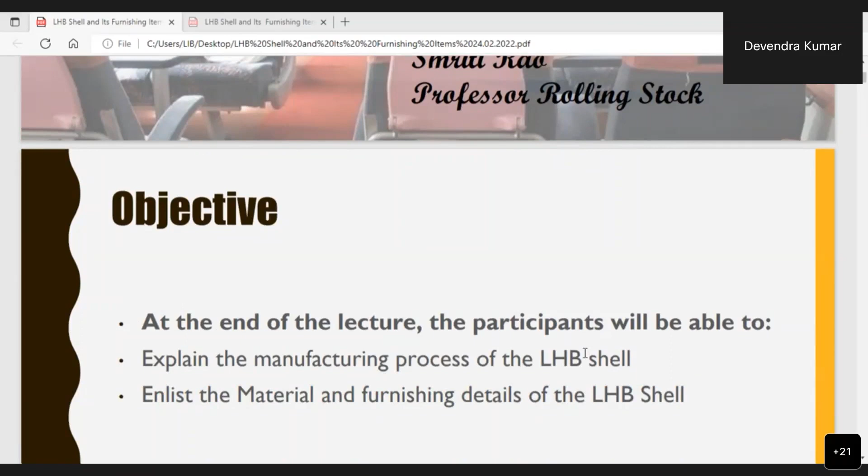Question: which of the following material is used in LHB coaches - austenitic steel, ferritic steel, Corten steel, or all of the above? Which one is correct? Some say C, but that is not correct. Others say A, but that is also not correct. Somebody else? All of the above - yes, this is correct.

Because in the LHB coaches, we are using all these materials in different components, which will be explained in this presentation.

Which of the following facts is not true about LHB coaches? The coaches are about 2 meters longer than ICF coach - is it true or false? True. Coaches got commissioned in 2003 - is it true or false? No.

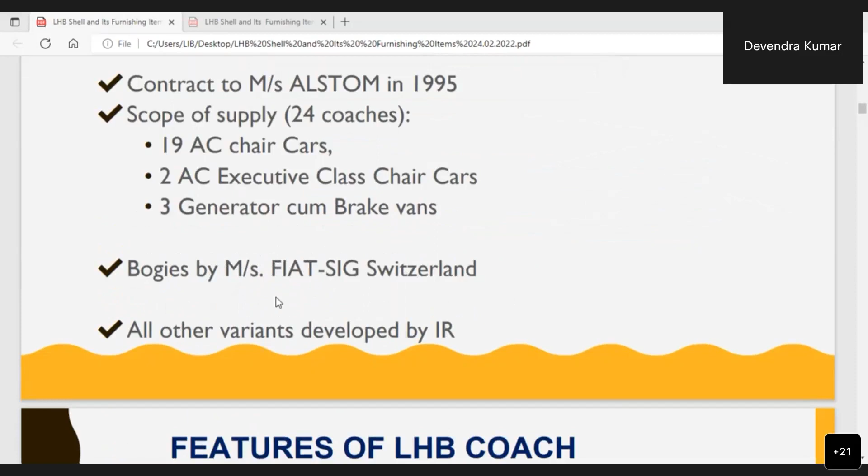Features of LHB coach: extensive use of stainless steel, whether it is LHB coach or hybrid coach - both use stainless steel, and we will be explaining later which parts are made out of which material. Attention is given for surface protection.

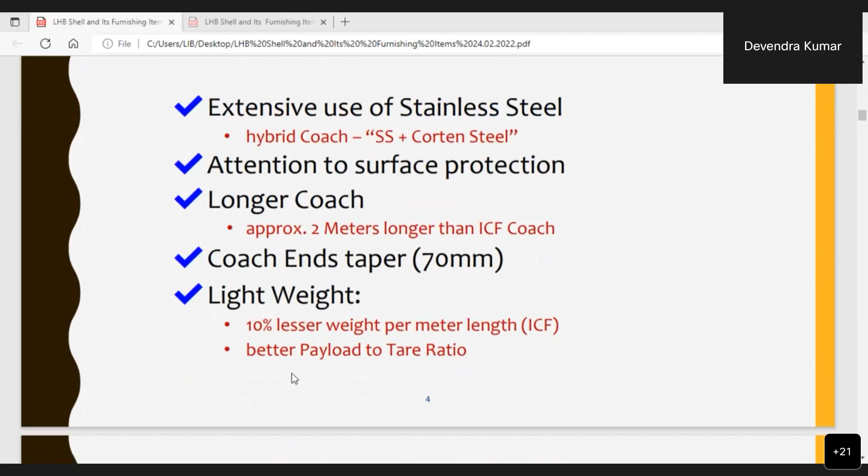Coach length is longer, approximately 2 meters longer than ICF coaches. Coach ends are tapered by 70 mm. This is a lightweight coach, 10% lesser weight per meter than ICF coaches - the total weight per meter is less by approximately 10%. This has got better payload to tare ratio.

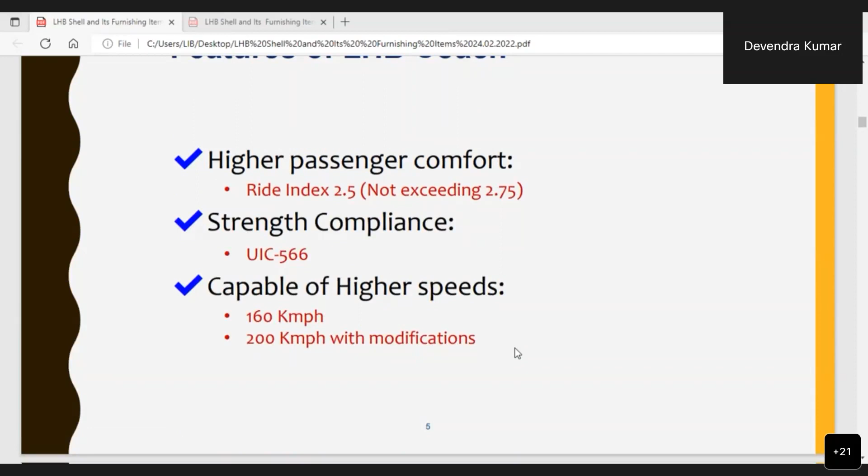LHB coaches have got higher passenger comfort by providing ride index not exceeding 2.75. Strength is as per UIC 566, and this is capable of higher speeds of 160 kmph, and with modifications it can run up to 200 kilometers per hour. For ICF coaches, it was only up to 130 kmph.

Ride index is a measure of the degree of comfort which passenger experiences while riding the coach. Higher the ride index, passenger comfort is less; lower the ride index, passenger comfort is greater. For calculating this ride index, a formula is used where V is the numerical value of the ride index, mean acceleration in centimeter per second square; F is frequency in hertz, and F(f) is correction factor. By this factor, we are able to calculate ride index.

In LHB shell, this is designed to withstand different loads at different sections. In the cantrail area, this can withstand 30 tons of compressive load. At window level, this can withstand up to 30 tons of compressive load, and at 350 height, this can withstand 40 tons of compressive load.

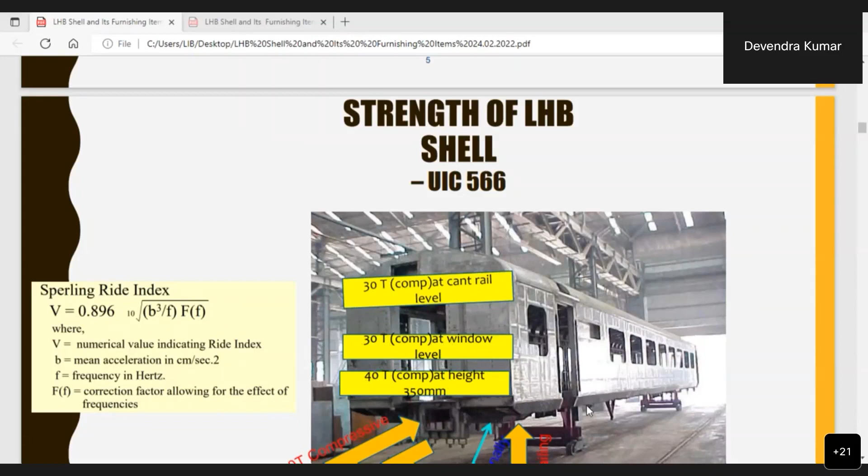At the couplers, compressive load that can be transmitted is up to 200 tons, and tensile load up to 150 tons, and 50 tons diagonally in this area.

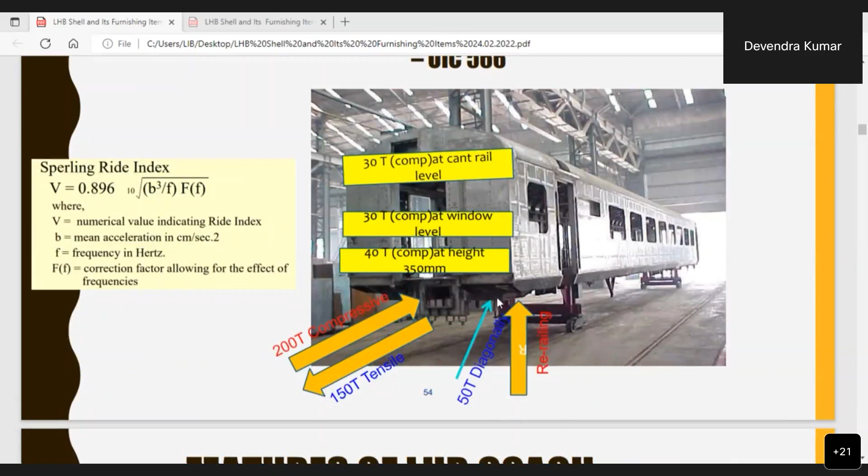Shell design is superior in the sense that the complete shell is interlocked. This has got better acoustic and vibration measures by providing superior insulation materials and damping elements, then superior brake systems - this is axle mounted disc brake system with WSP. This LHB coach is provided with center buffer coupler, which has got anti-climbing features.

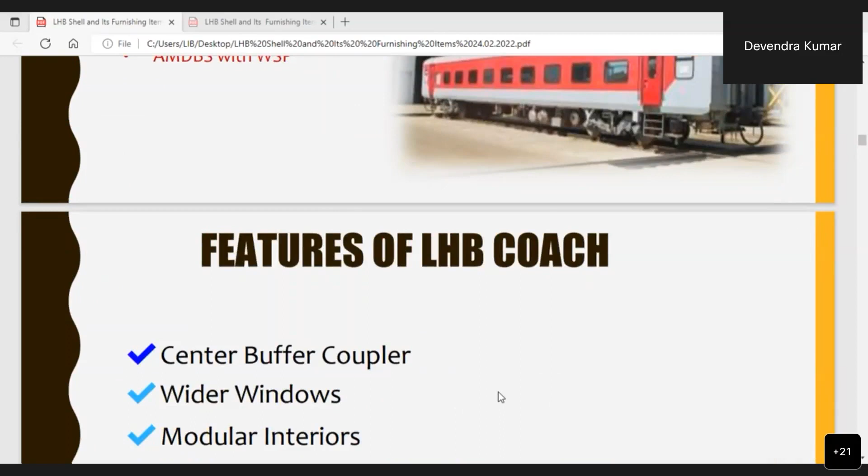It uses wider windows for better view, then modular interiors, improved air conditioning system, use of fire retardant materials. Sound and vibration measures: for sound insulation, sound insulating paint is provided, then cork sandwich floating floor with rubber decoupling elements.

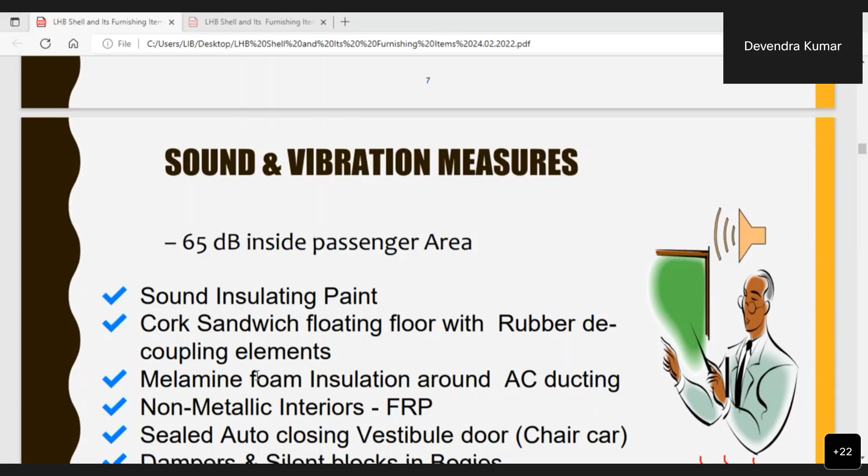Then melamine foam insulation around AC ducting, non-metallic interiors of FRP, sealed auto sealing, auto closing vestibule doors in the chair cars, and dampers and silent blocks in bogies.

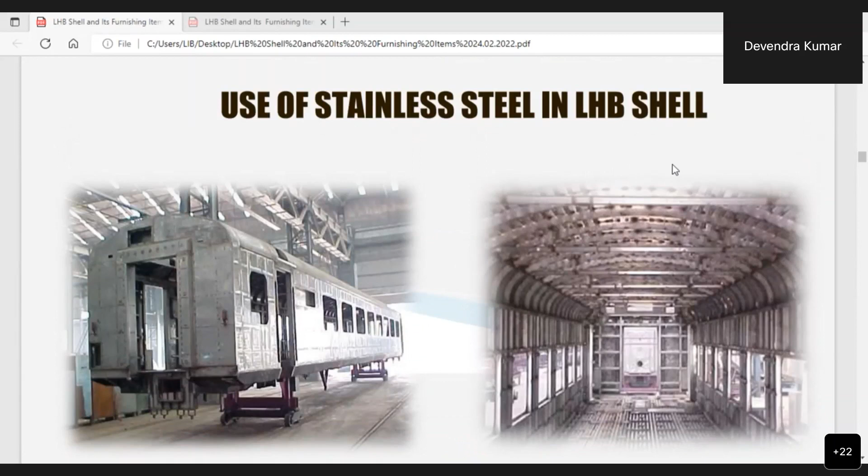LHB shell has extensive use of stainless steel. The shell is prepared by manufacturing the side walls, end walls, and under frames separately, and then they are assembled. This is the exterior portion and this is the interior portion.

Why are we using stainless steel in coaches? This is because in India, the environment is such that with the use of Corten steel, which we were using in ICF coaches, there was a lot of corrosion due to climatic conditions.

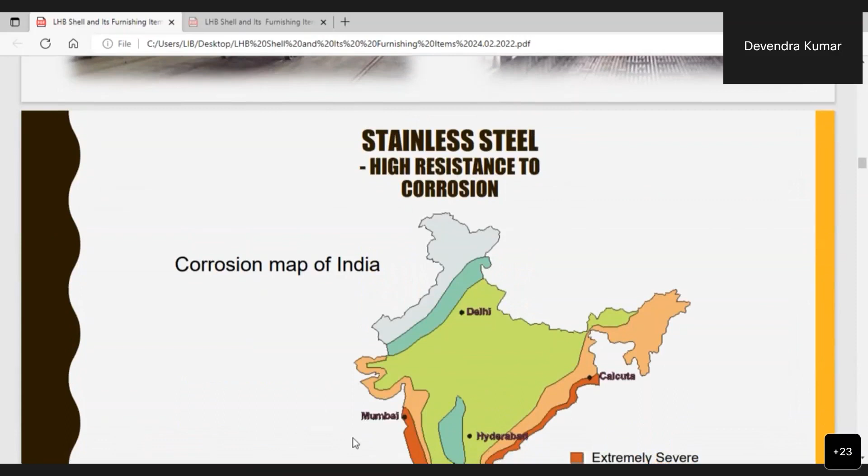Based on the corrosion, this is the corrosion map of India. From this we can see that in coastal areas, corrosion is extremely severe. In adjacent areas, this is severe, and in internal parts of the country, shown in this color, we have moderate corrosion in this area and this area. Where the weather is drier, corrosion is mild, and in the areas of Jammu and Kashmir and parts of this belt, Rajasthan, Punjab and Jammu and Kashmir, corrosion is negligible.

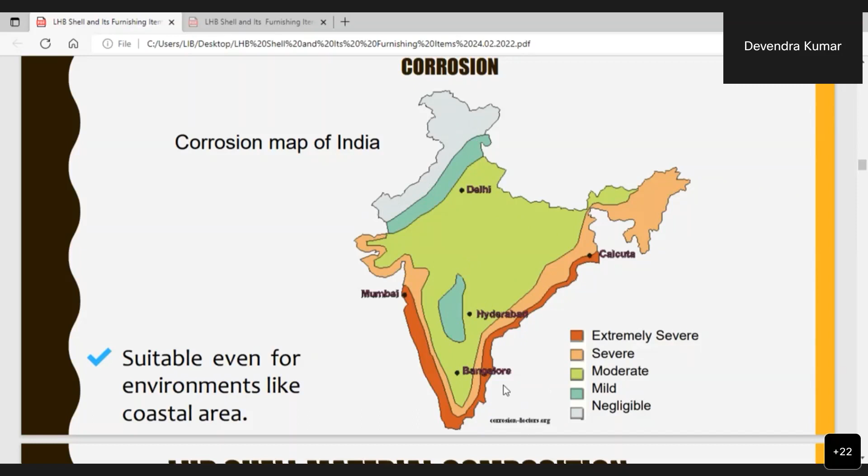So with the use of stainless steel, the coach becomes suitable even for environments like coastal areas, in which we were having extremely severe conditions with respect to corrosion.

Roof coach shell: in the roof we have got roof arches, which have a fixed radius throughout, and these roof arches are made out of 2 mm thick ferritic steel.

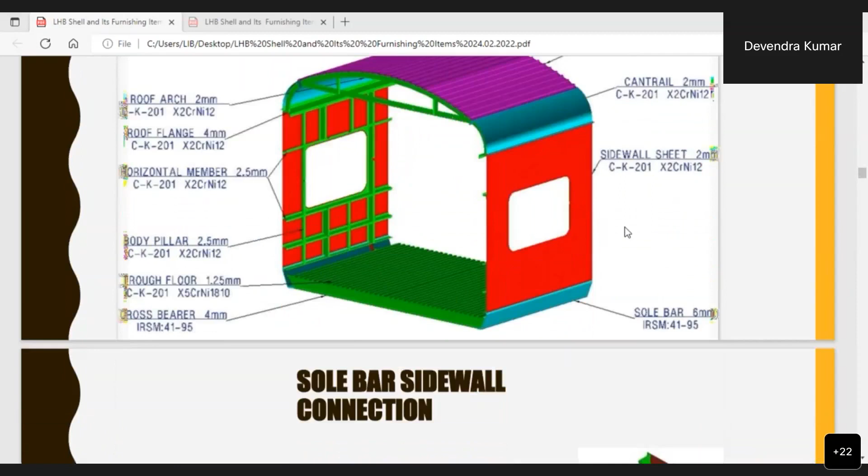Roof sheet is 1.25 mm, this is austenitic steel. And cantrail is 2 mm thick, this is made out of ferritic steel.

Then sidewall sheet, 2 mm thick, this is also ferritic steel. Sole bar, 6 mm, this is Corten steel.

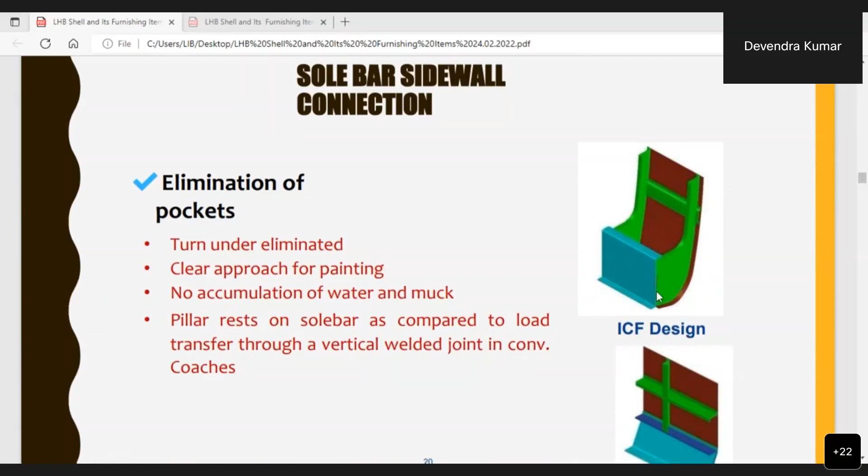Turn under is eliminated in LHB coaches, giving a clear approach for painting. Earlier, due to the turn-under, painting in the interior was difficult.

Pillar rests on the sole bar as compared to the load transfer through a vertical welded joint in conventional coaches. In conventional coaches, the welding was done in a vertical manner, whereas in case of LHB coaches, pillars are resting directly on the sole bar.

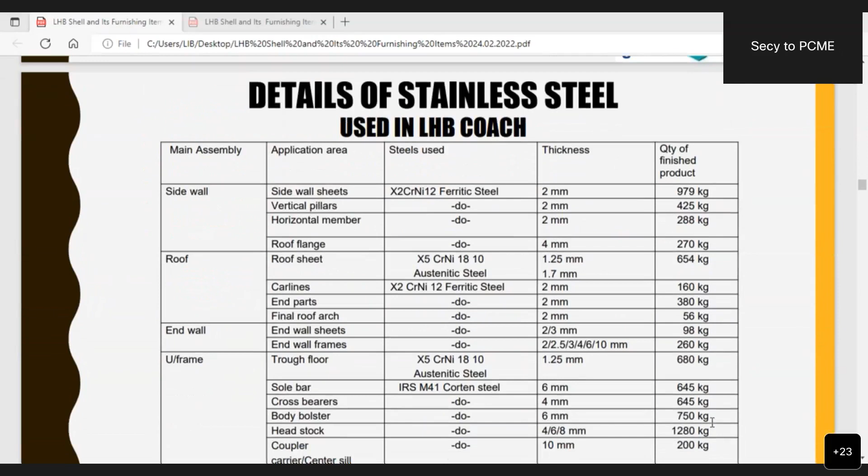This table gives the use of different materials, which type of material is used and of which thickness. So in the side walls, the sidewall sheets are ferritic steel, 2 mm thick, and the quantity used per coach is 979 kg. Vertical pillars, this is also ferritic steel, thickness 2 mm, per coach quantity required is 425 kg.

Horizontal members, all these members can be located in this diagram. Horizontal members in the side wall are 2 mm thick ferritic steel, total quantity used is 288 kg per coach. Roof flange, 4 mm thick, this is also ferritic steel, 270 kg of this item is used in every coach.

Now the roof sheet is austenitic steel, thickness 1.25 mm, quantity 654 kg. Carlines are ferritic steel, thickness 2 mm, quantity required 160 kg. End parts also ferritic steel, thickness 2 mm, quantity required 380 kg. Roof arc, also ferritic steel, thickness 2 mm, quantity required 56 kg per coach.

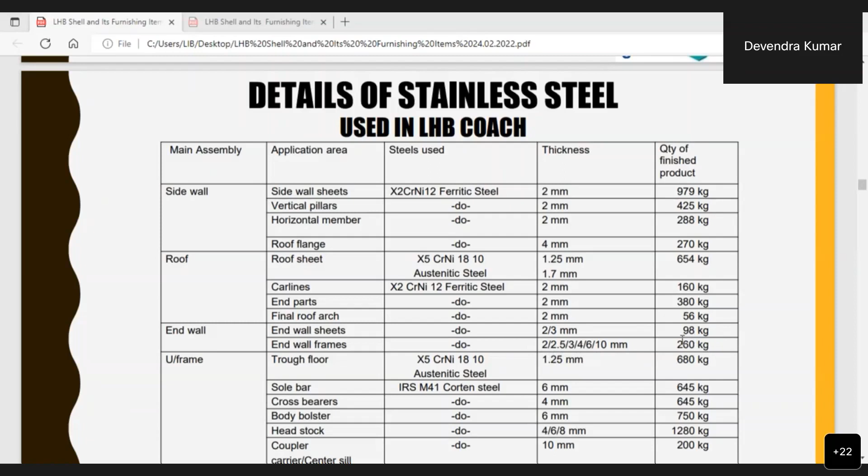Now the end wall sheets, this is also ferritic steel, thickness 2 mm and 3 mm. For different types of coaches, different thickness is used, and total requirement is 98 kg per coach. End wall frames: 2.5, 3, 4, 6 and 10 mm, different types are used, and total weight is 260 kg per coach.

In the under frame, trough floor is austenitic steel, thickness 1.25 mm, quantity required 680 kg per coach. Sole bar is Corten steel, thickness 6 mm, quantity required 645 kg per coach. Cross bearers, thickness 4 mm, quantity required 645 kg. Body bolster, thickness 6 mm, quantity required 750 kg per coach. Headstock, 4, 6 or 8 mm.

Quantity required: 1280 kg per coach. Coupler carrier and center sill, this is 10 mm thick.

Quantity required 200 kg per coach. All these items are of carbon steel.

Then there are certain vendor supplied items which are used in the LHB coaches, like water tanks. This is stainless steel 316 titanium alloy. It is having titanium, thickness 3 mm. Quantity required 300 kg per coach.

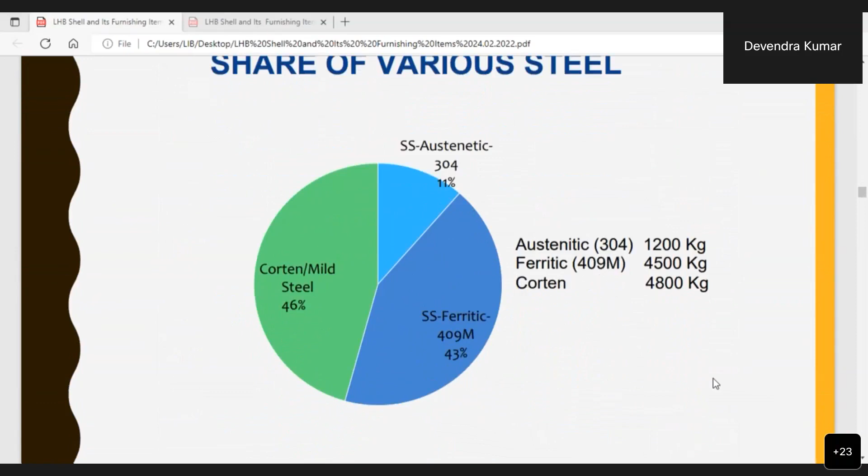From this table, we can find out the percentage of different items used in LHB coaches: carbon steel 46%, ferritic steel 43%, and austenitic steel 11%. And this is the total weight of all these three items.

Properties of steels used in LHB coaches.

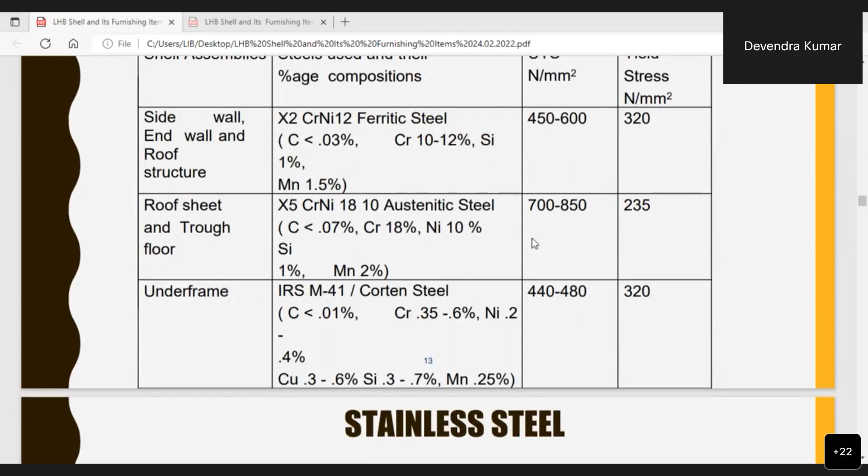Austenitic steel's composition: carbon is less than 0.07%, chromium is 18%, nickel 10%, silicon 1% and manganese 2%. This austenitic steel is used in roof sheet and trough floor, whose ultimate tensile strength is 700 to 850 Newton per mm square and yield stress is 235 Newton per mm square.

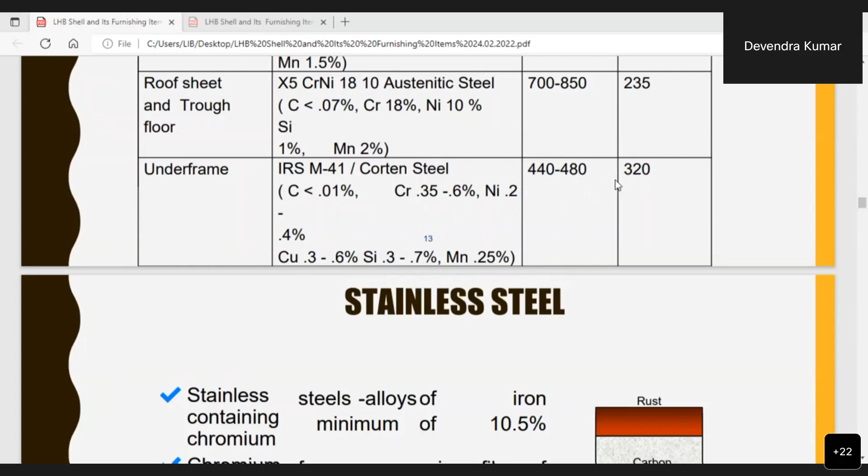In the under frame, carbon steel is used, whose composition is carbon less than 0.01%, chromium 0.35 to 0.6%, nickel 0.2 to 0.4%, copper 0.3 to 0.6%, silicon 0.3 to 0.7% and manganese 0.25%. Its ultimate strength is 440 to 480 Newton per mm square and yield strength is 320 Newton per mm square.

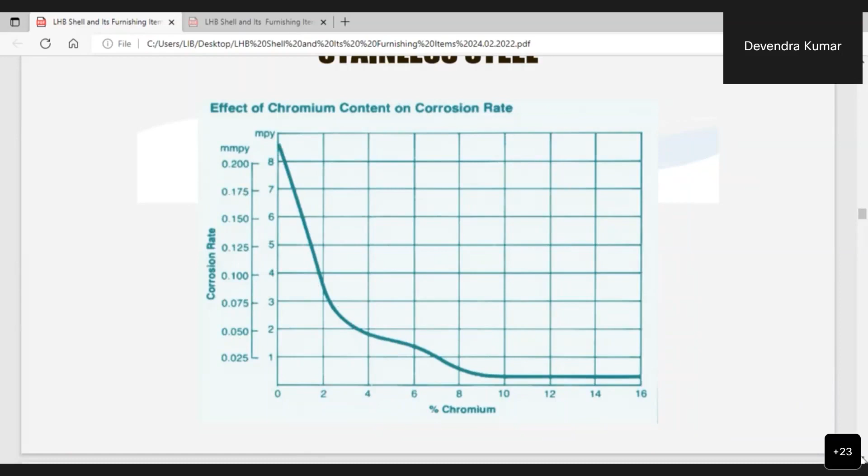If we use mild steel, then the life of that item is only 5 to 6 years because of high corrosion. Whereas if carbon steel is used, life becomes 20 to 25 years with major corrosion repairs every 10 to 12 years. But if we use stainless steel, then life becomes more than 40 years with negligible maintenance.

Stainless steel absorbs 2.5 times more energy than carbon steels, so this is less fatal in accidents, because in case of high impact accidents, the impact energy gets transmitted to the interior of the coach.

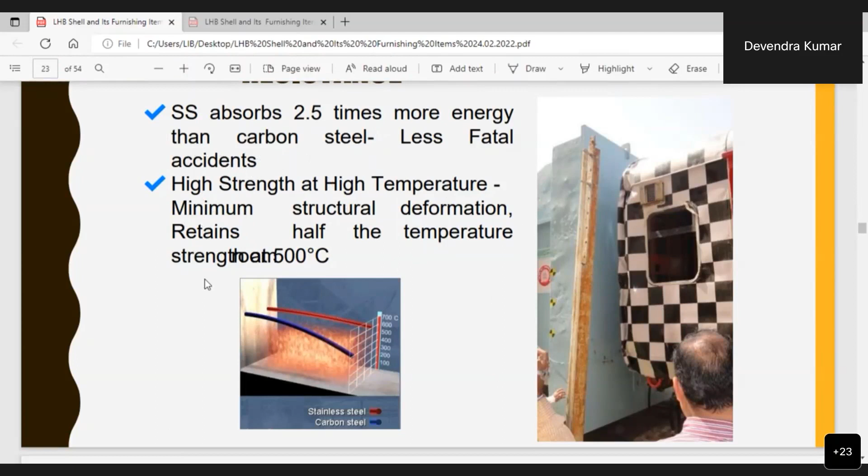High strength at high temperature with minimum structural deformation - it retains half of the temperature strength at 500 degrees centigrade. Even at elevated temperatures, strength of stainless steel remains high; even at 500 degrees temperature, half of the strength is retained.

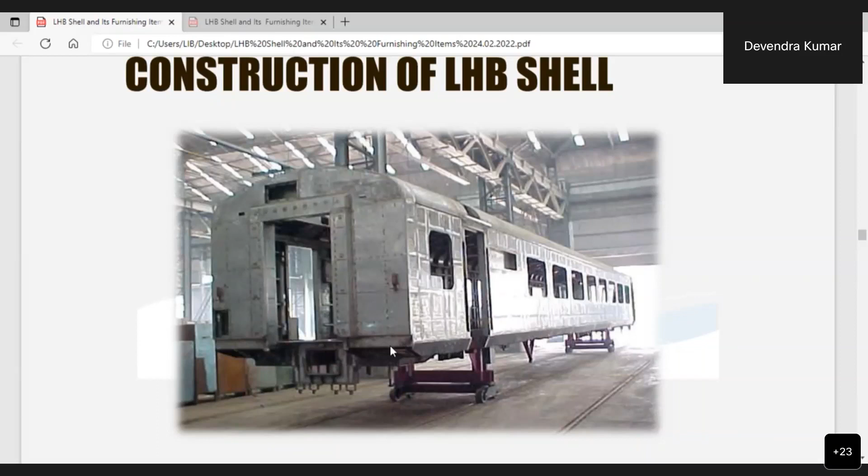Construction of LHB shell: side walls, end walls, roof and under frame. They are manufactured separately and then they are assembled together. While assembly, proper edge preparation has to be made while joining the side walls with under frame and end walls with under frame. Side walls, under frame, roof structure, end walls, they are all made separately and then they are assembled together.

Side wall features: the side walls are manufactured by TIG welding of the sheets to achieve low heat inputs, less distortion and negligible shrinkage. TIG welding यूज करने से हीट अफेक्टेड जोन कम होता है, उसके कारण जो डिस्टॉर्शन is less.

And then door frames are part of the sub assembly of side wall but are fabricated separately to take up tolerances. Although जब कोच के फिटेड कंडीशंस में होते हैं तो डोर्स becomes integral part of the side wall, but these are manufactured separately and उनकी fitting separate होती है so that there are some tolerances.

Side wall is welded to the under frame by V grooving of the sole bar. Weldable primer is applied to avoid bimetallic corrosion.

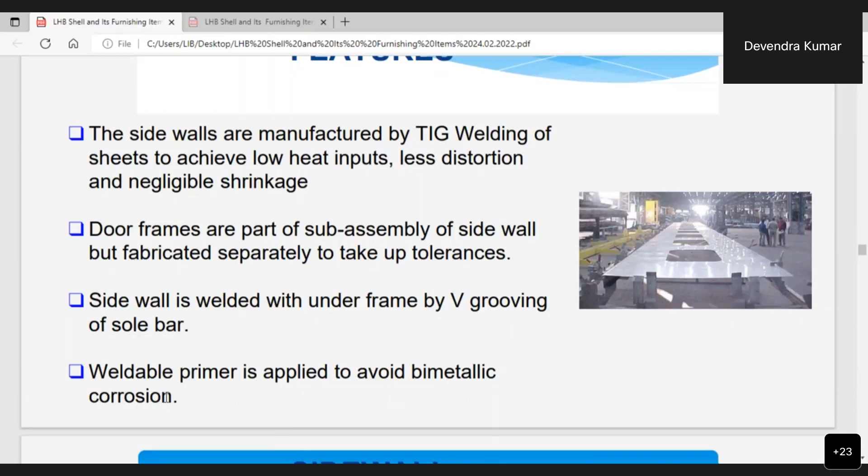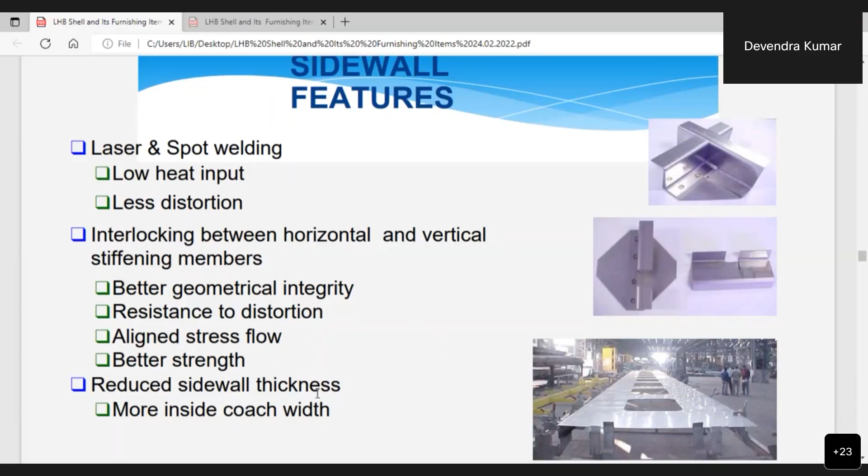Then reduced sidewall thickness. Sidewall thickness means not only this stainless steel sheet, इसमें पिलर्स लगे होते हैं और अंदर में FRP का जो इंटीरियर पैनल होता है, तो टोटल जो थिकनेस होती है इन केस ऑफ LHB शेल दिस इज लेस देन द ICF शेल. ICF शेल की साइड वॉल का थिकनेस it is 90 mm, whereas in case of LHB shell this is only 60 mm. इस रिडक्शन के कारण interior width of the coach increases, which gives more space for passengers.

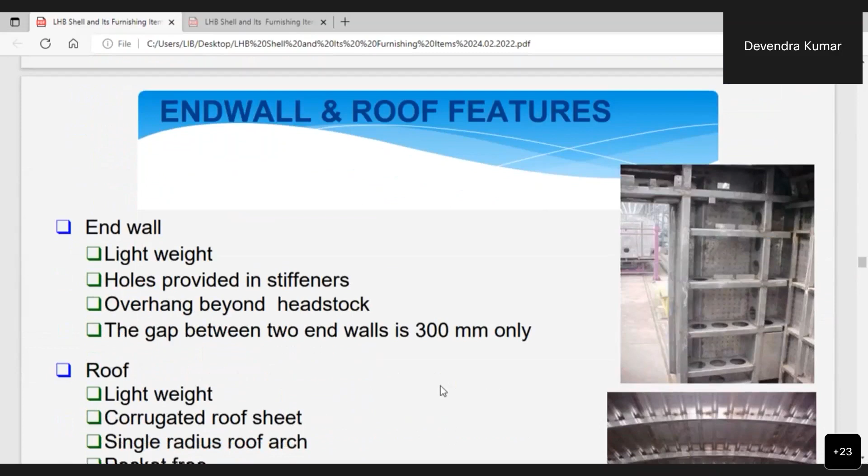End wall and roof features. End walls में this has to be made lightweight. Lightweight करने के लिए इस कंस्ट्रक्शन में जो स्टिफनर्स होते हैं they are provided with holes. Then this end wall overhangs beyond the headstock. And gap between two end walls is 300 mm only. दो कोचेस के बीच में एंड वॉल्स के बीच में गैप इज 300 mm.

Roof is lightweight. It uses corrugated roof sheet. Single radius roof arch. Roof arch का radius is single radius. ये नहीं कि different sections में different radius है. Complete arch is having same radius. Then pocket free. There are no pockets in that roof.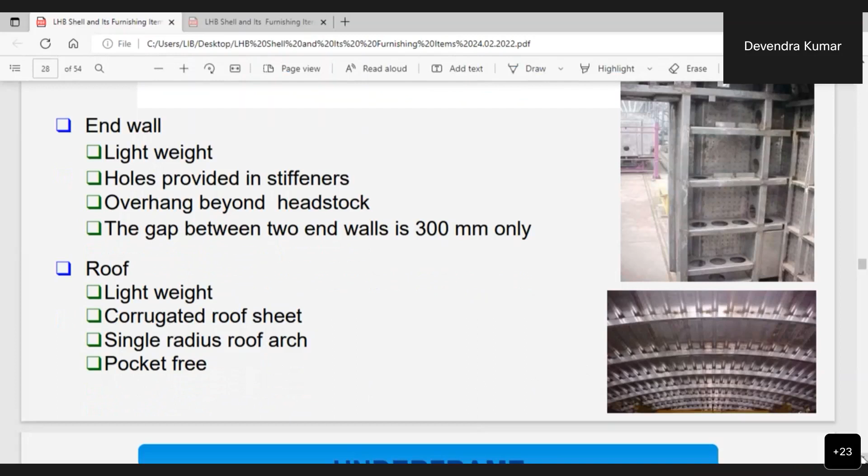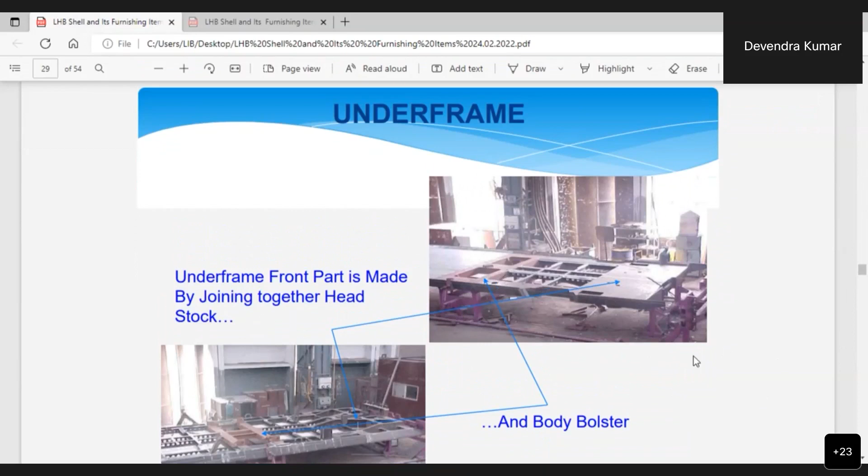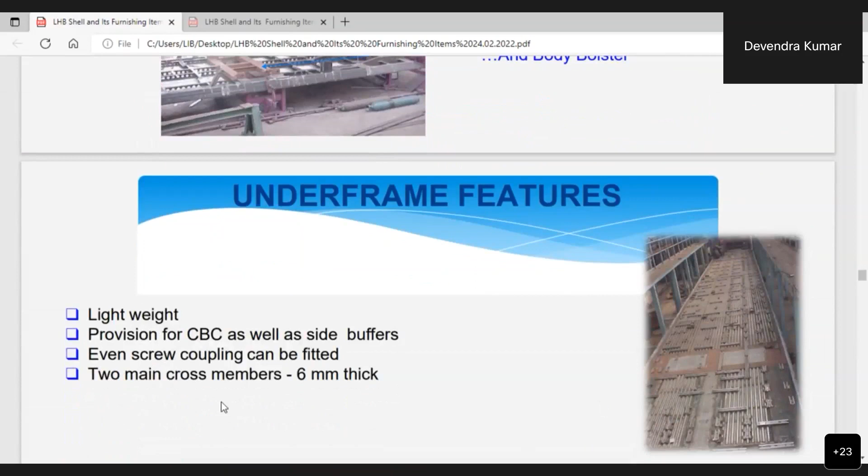Underframe front part is made by joining together the headstock and the body bolster. This is headstock and this is body bolster. दोनों को join करके complete front part बनता है, उसी तरह से rear part is made in the same fashion. Features of underframe: these are lightweight, provision for CBC as well as side buffers. Even screw coupling can be fitted within this shell. Two main cross members are 6 mm thick.

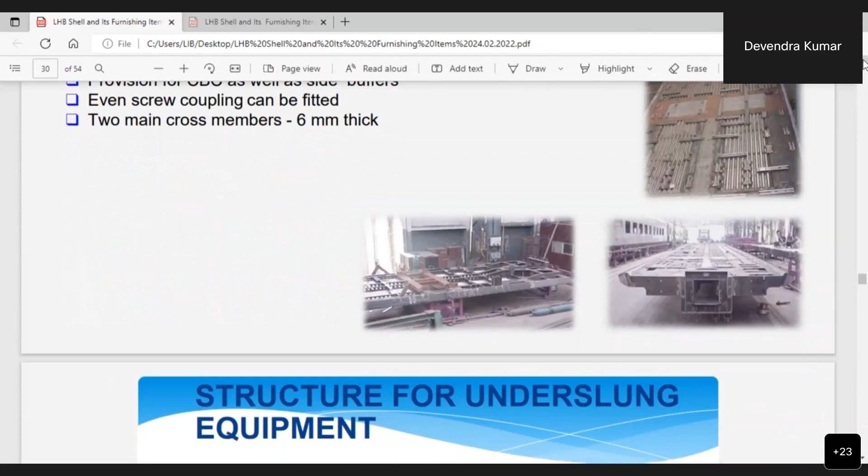This underframe design is older design, this is a diagonal construction, but now this construction has been changed to take care of crash worthiness of the coaches. उसके लिए क्या किया गया है कि

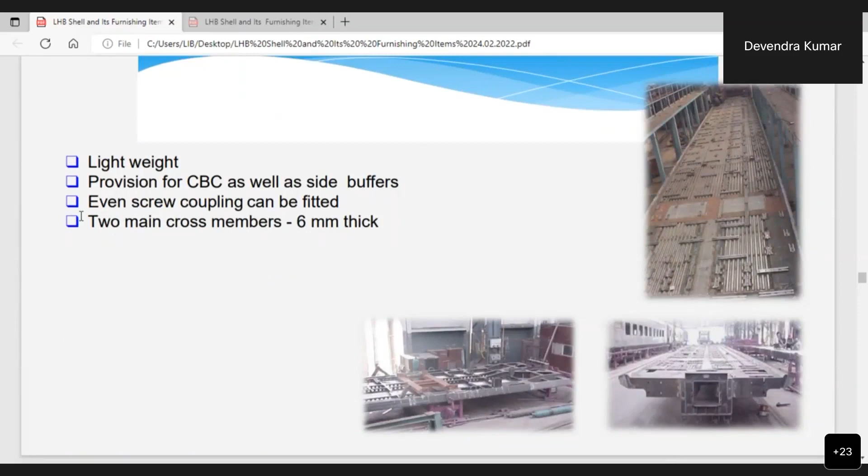Features of underframe: this is lightweight, provision of CBC as well as side buffers, even screw coupling; two main cross members are 6 mm thick. And then underslung components like water tanks and yaw dampers are fitted in the underframe. Water tank brackets are fitted in the underframe in this location, and yaw dampers are fitted in this location.

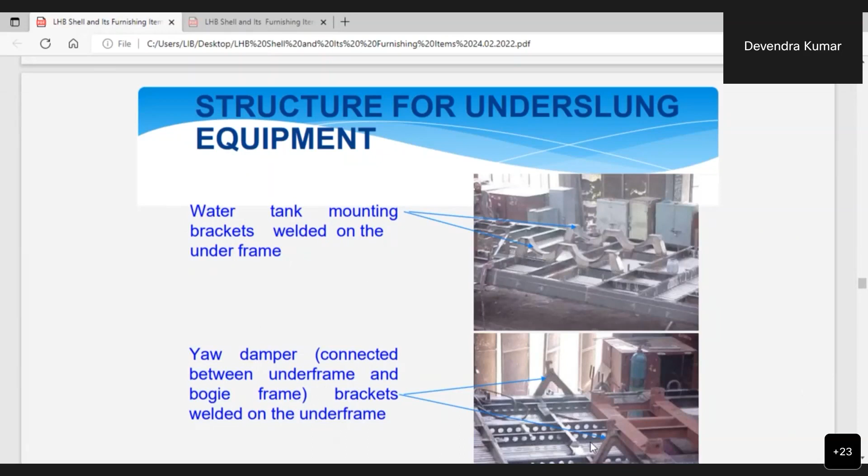Trough floor is welded with the cross members by plug welding. ये सब देखें, ये plug welding के कारण ये निशान हुआ है. Underframe corrugated austenitic trough floor is plug welded from top with cross members. Weldable primer is used for welding carbon steel to stainless steel to prevent bimetallic corrosion.

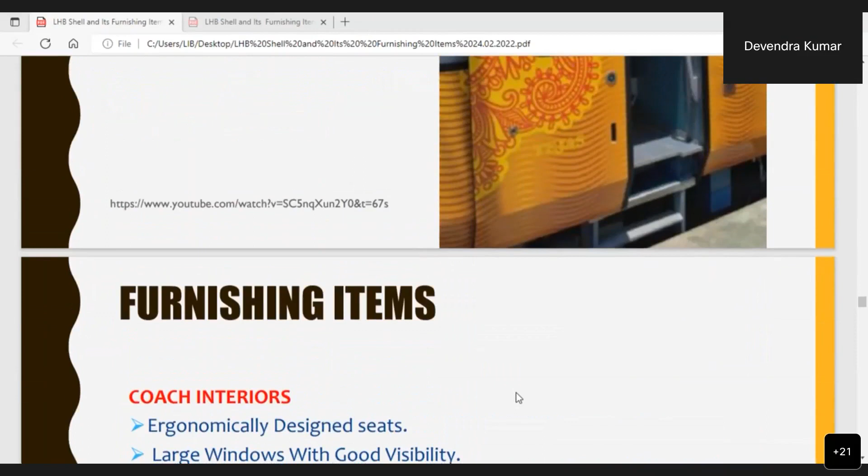Okay, can we start again? Okay. So shell portion we have completed. Now we will go for furnishing. Furnishing items are provided for giving aesthetics and comfort to the passengers. Coach interiors have been designed ergonomically. Large windows with good visibility have been provided. Aluminum luggage racks with inbuilt reading lamps have been provided in chair cars.

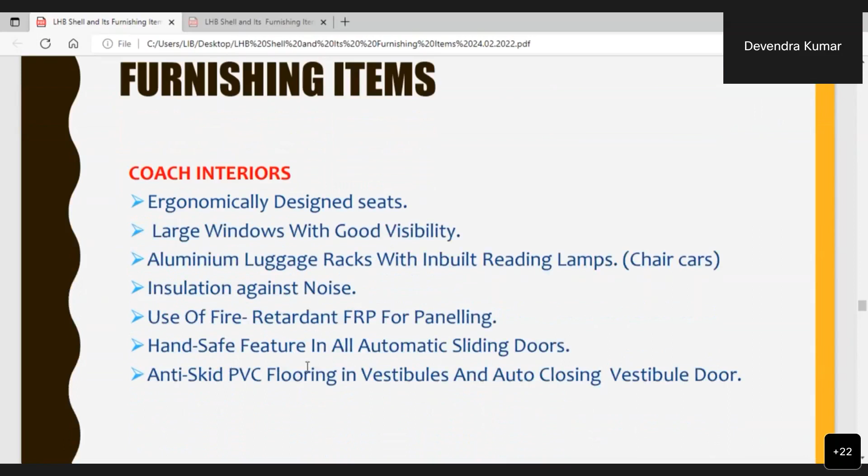Insulation against noise has been provided. Use of fire retardant FRP for paneling. Panels में जो use होता है FRP, which is fire retardant. Hand safe feature in all automatic sliding doors. क्योंकि sliding doors are operating by leaf springs, तो इनमें hand safe provision किया गया है by providing rubber sealing on the edges.

Then anti-skid PVC flooring in vestibules and auto closing vestibule doors. Vestibule doors are auto closing and anti-skid PVC flooring has been provided. Anti-skid provision provide करने के लिए जो PVC में होता है, this is impregnated with mica.

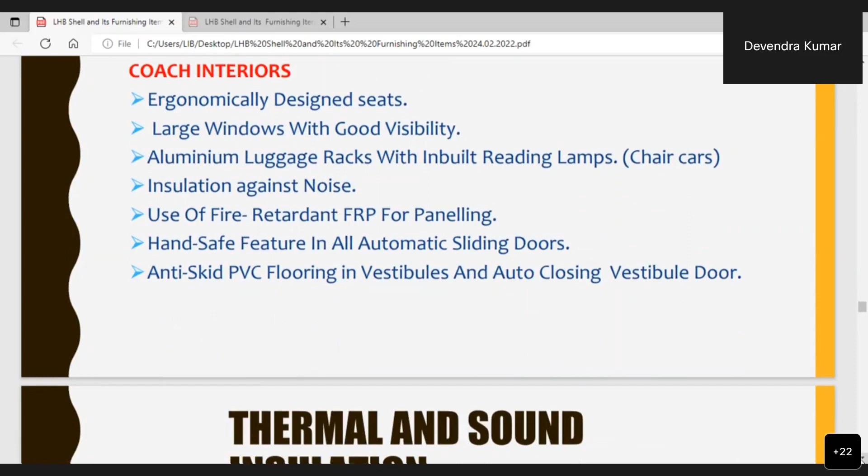Thermal and sound insulation. Baryskin V60dB or equivalent sound insulation PU paints on full coach shell interior provide anti-drumming sound insulation as well as corrosion resistance. जो PU paint किया जाता है on the coach interior, this provides sound insulation as well as corrosion resistance. दोनों पर्पस पूरा करता है. Coating of 2 to 3 mm thickness in the coach interior. कंप्लीट इंटीरियर में 2 to 3 mm थिकनेस प्रोवाइड की जाती है and in the bolster area this is 6 to 8 mm thick.

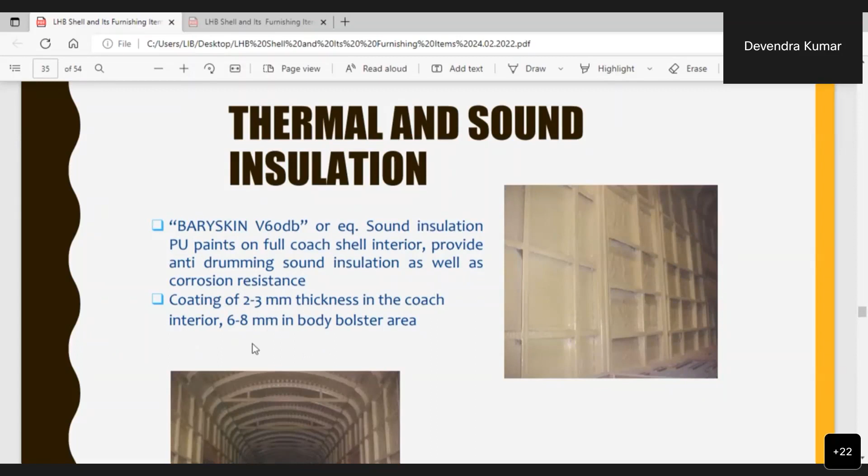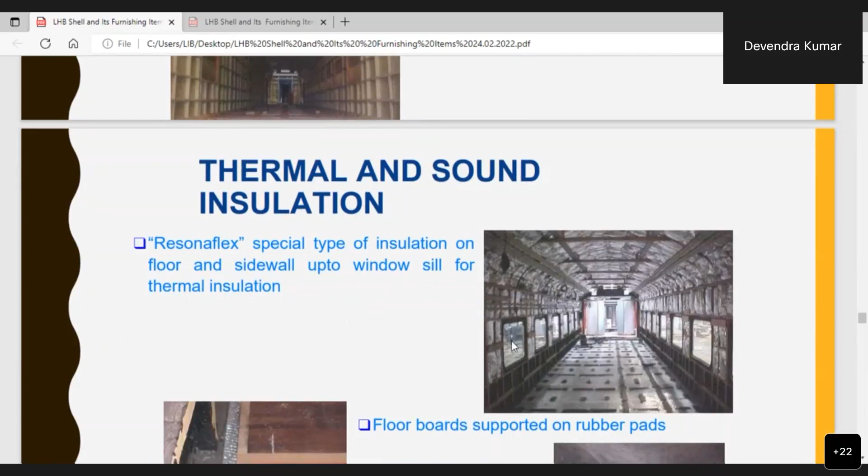Thermal and sound insulation by Resonaflex special type insulation on floor and side wall up to the window sill height for thermal insulation. Floorboards are supported on rubber pads, and floorboards are made out of compressed plywood and cork sandwich for better sound insulation.

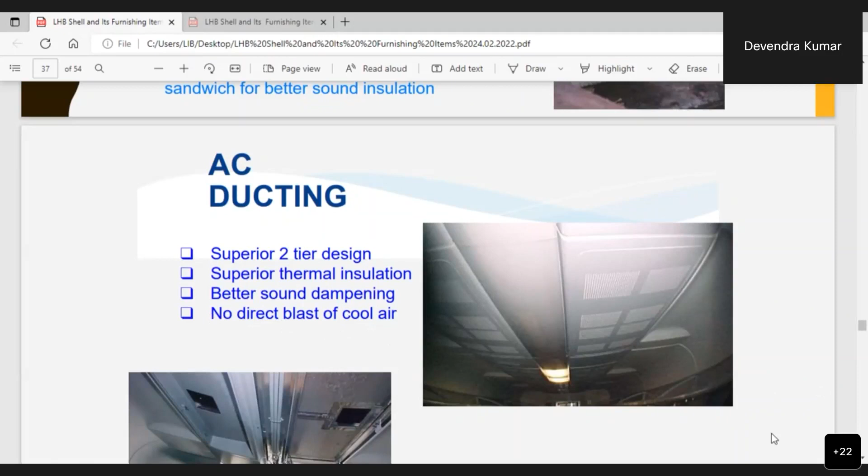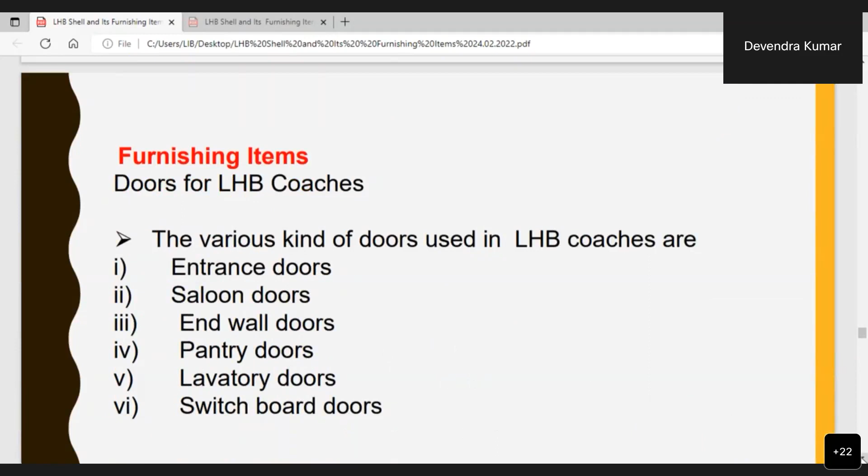LHB coaches have got various types of doors like entrance doors, saloon doors, end wall doors, pantry doors, lavatory doors, switchboard doors. और इन doors के डिजाइन में, these body side doors are hinge type swing sandwich doors. Sandwich door means one side is stainless steel, ferritic stainless steel, and interior panel is made by FRP, और this is filled with phenolic resin for better heat insulation.

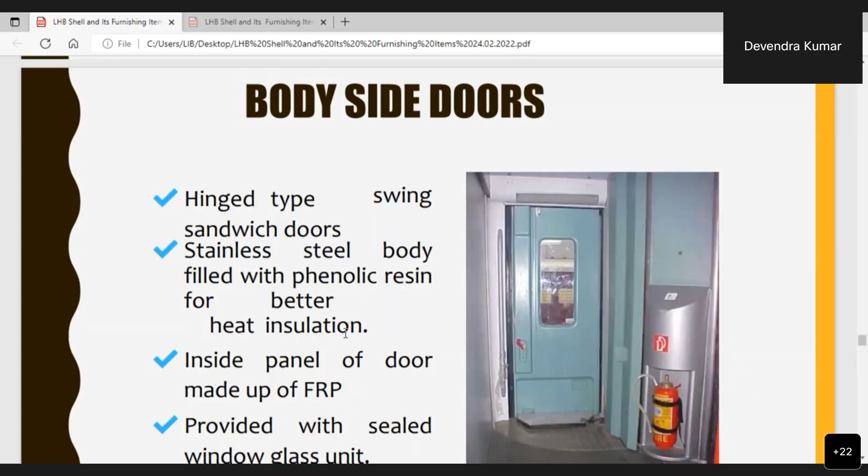Inside panel of door is made out of FRP. This is provided with sealed window glass unit. Sealed window glass unit provide की जाती है, which is 6 mm thick glass.

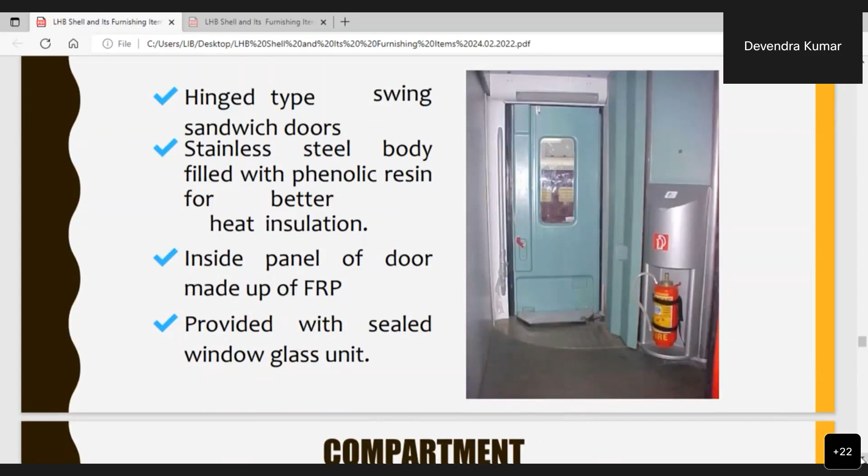Then compartment doors. Compartment doors are the doors for entry of passengers in the compartment. This is single flap sliding door. Stainless steel body filled with phenolic resin for better heat insulation. जो इसका कंस्ट्रक्शन होता है, this is made out of stainless steel, and interior panel is FRP, and in between this is filled with phenolic resin. Manual opening and auto closing type door. Opening is manual and closing is automatic.

This is provided with rubber sealing at the door leaf for hand safe feature. Provided with air grill for air circulation. Bottom में air grill provide किया जाता है. This is fitted with 6 mm glass for viewing. This is 6 mm thick glass.

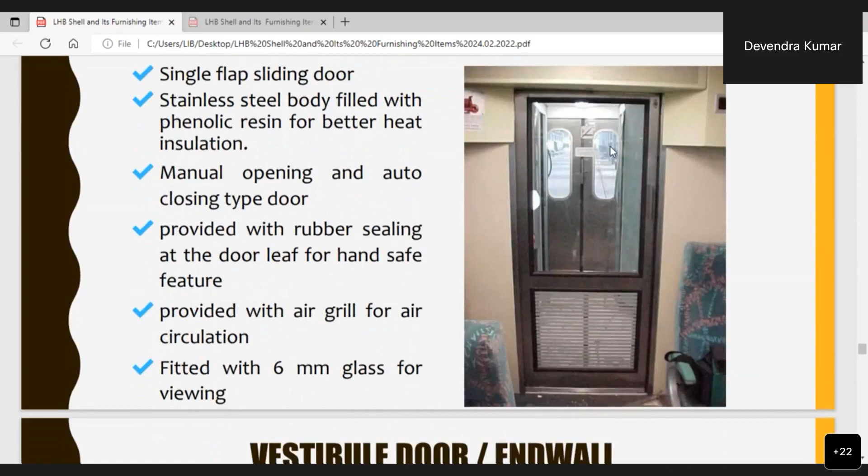Then vestibule door or end wall door. These are double flap doors. Compartment doors were single flap, whereas the vestibule door is a double flap door. This is also a sliding type door. This is opened manually and closed automatically. Manual opening and auto closing type door.

Fire barrier all around. This is provided with rubber sealing at the door leaf for hand safe operation. Stainless steel body filled with phenolic resin for better heat insulation and security of the coaches. This is also fitted with 6 mm glass for viewing. This door opens only 250 mm when the gangway bridge plate is folded up.

जो वेस्टिबुल फॉल प्लेट होता है, when that is in folded condition, this door can be opened only up to 250 mm.

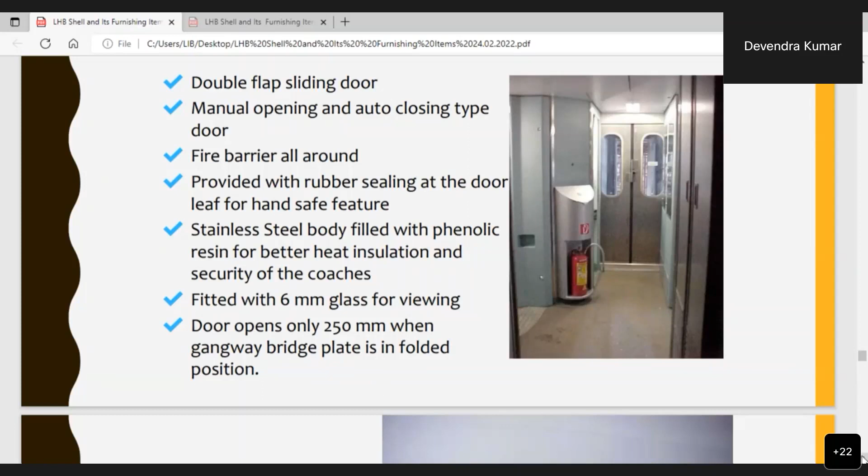Underslung components में water tanks are fitted by underslung arrangement. And a 30-liter water tank, overhead tank, is provided in the lavatory.

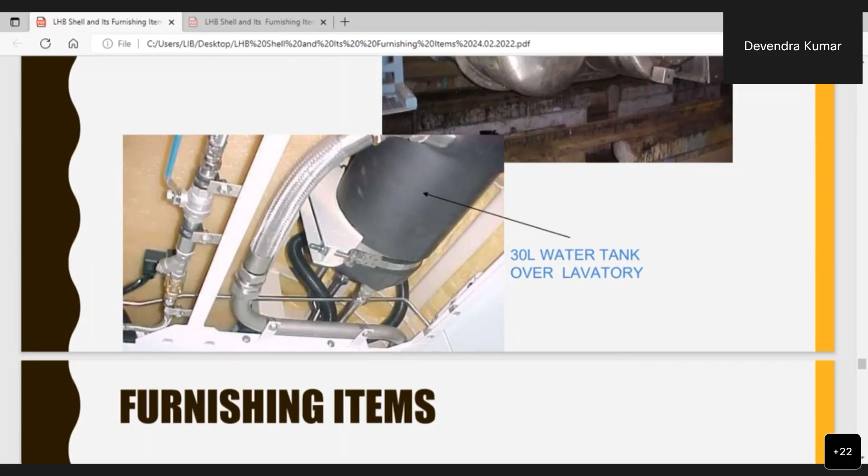The furnishing items in the coaches are the floor, seats, upholstery cloth, luggage rack, doors for LHB coaches, sealed window glass unit, roller blinds. Flooring is PVC flooring. Seats, then upholstery cloth, luggage rack. This is provided in the chair cars. Doors for LHB coaches, sealed window glass unit, roller blinds. This is also in chair coaches only.

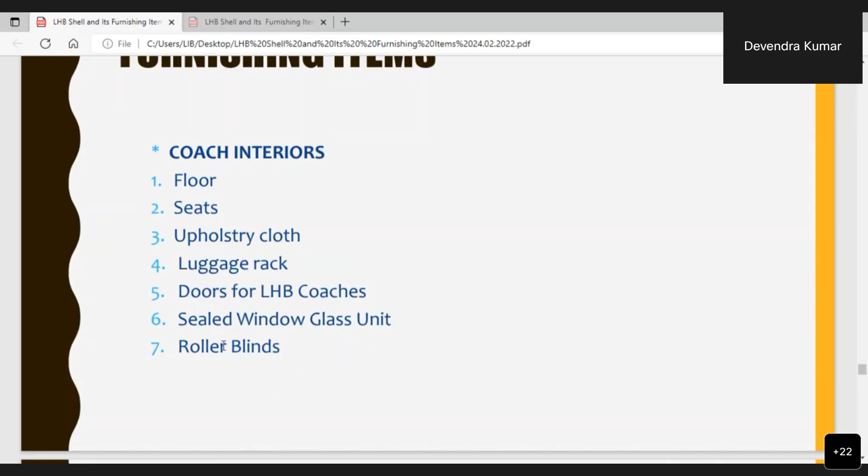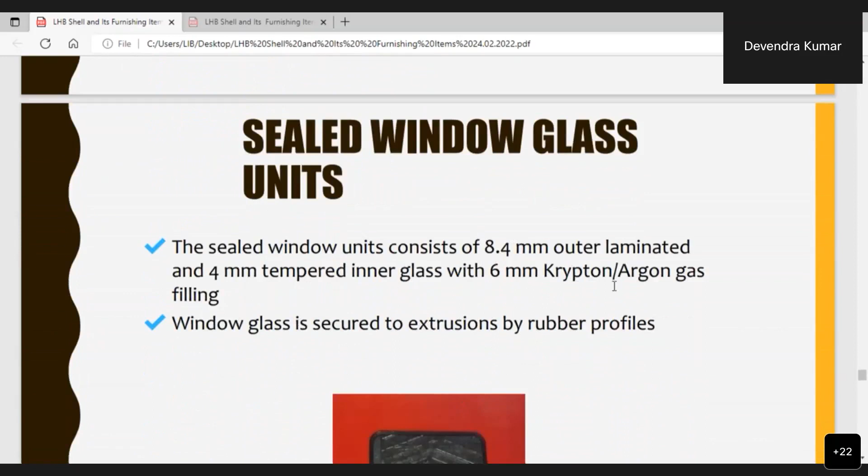Sealed window glass units. The sealed window glass unit consists of 8.4 mm outer laminated and 4 mm tempered glass with 6 mm krypton argon gas filling.

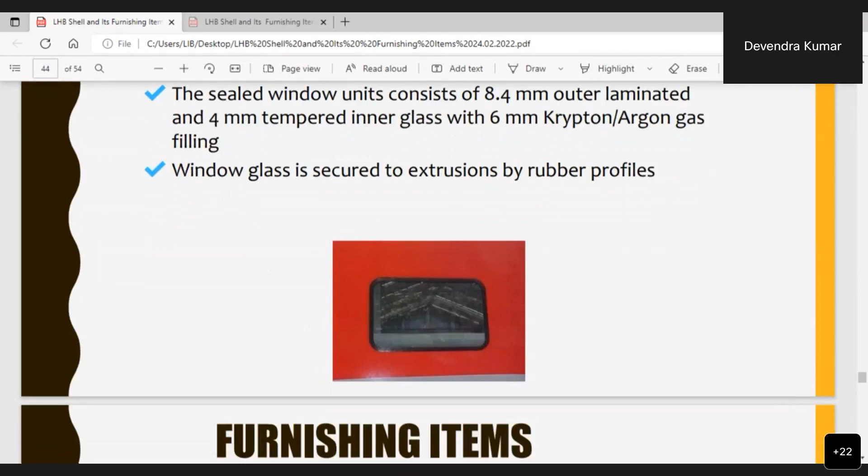Aluminum extrusions are fitted in which the window glass is fitted, and then that is sealed by rubber. Roller blinds have been provided on the window in AC chair car instead of curtains. The roller blind is manually operated. These blinds have 3 positions: full open, half open, and full closed.

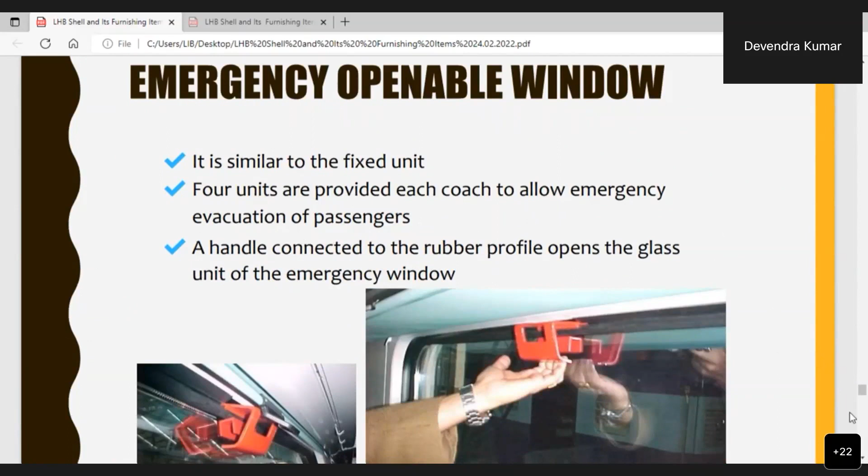Emergency openable window. This is similar to the fixed type unit. 4 units are provided in each coach to allow emergency evacuation of passengers. In emergency windows there is a handle connected to the rubber profile which opens the glass unit of the emergency window.

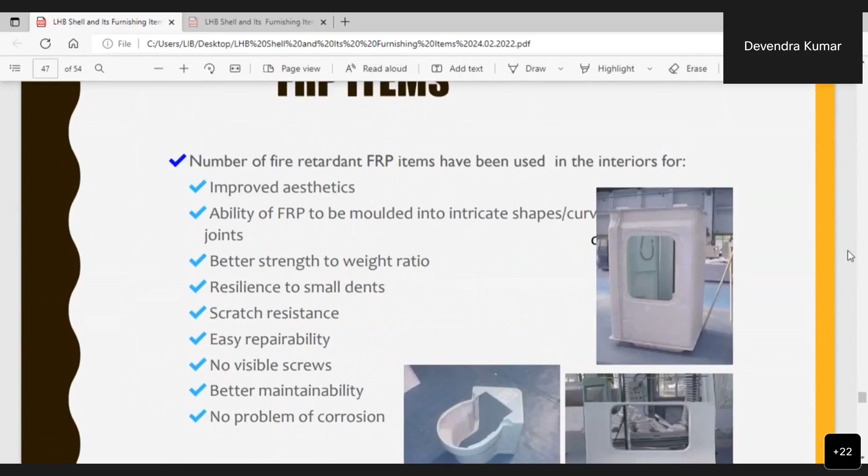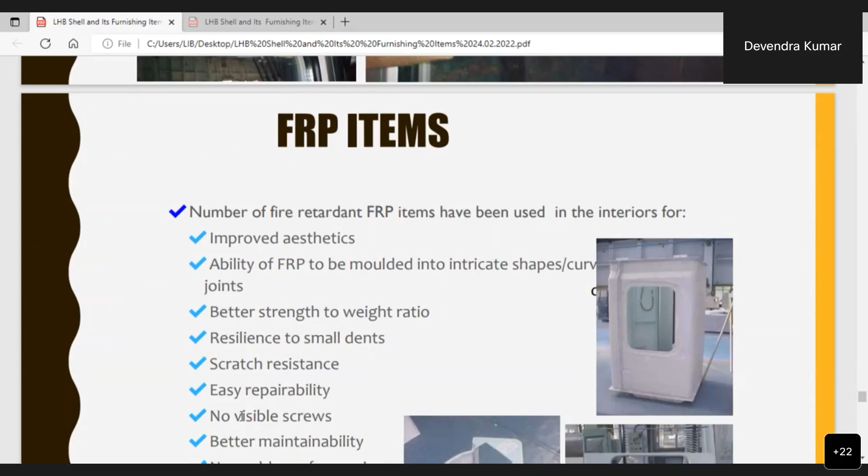In coach interiors, a number of FRP items have been used. The purpose is these FRP items have got better aesthetics. They have the ability to be molded into intricate shapes and curved joints. FRP को easily mold किया जा सकता है. These have got better strength to weight ratio. Then these are resilient to small dents. Scratch resistance, then easy repairability. These can be repaired easily.

No visible screws. Screws are countersunk and hidden in these. Then better maintainability. No problem of corrosion. तो FRP आइटम्स में होता है, उसमें कोरोजन का कोई प्रॉब्लम नहीं।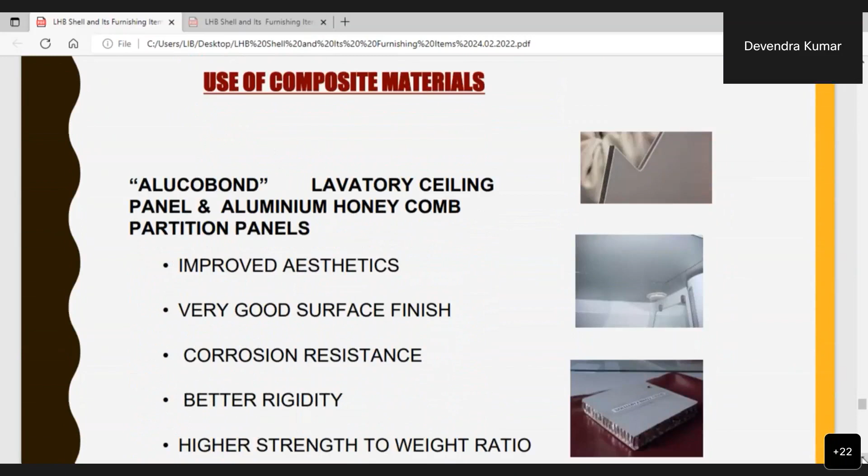Composite materials are used in the coach, like in the toilet, Alucobond lavatory ceiling panels and aluminum honeycomb partition panels are provided. These give improved aesthetics, have a very good surface finish, they are corrosion resistant, they have better rigidity, and they have a higher strength to weight ratio.

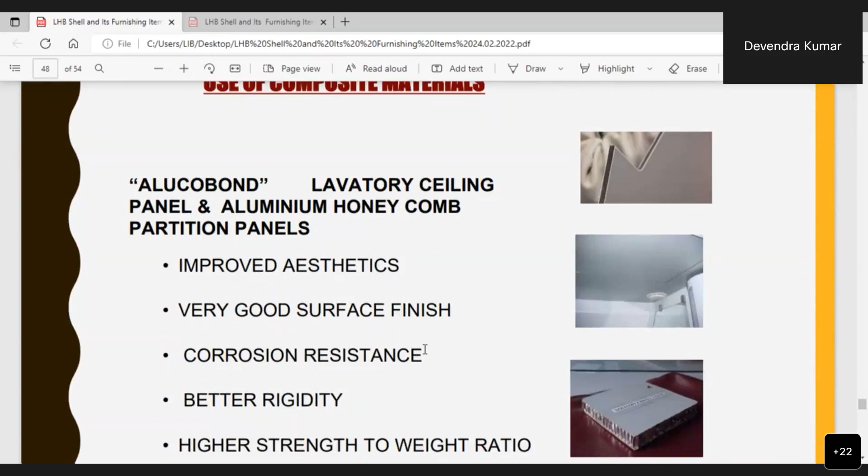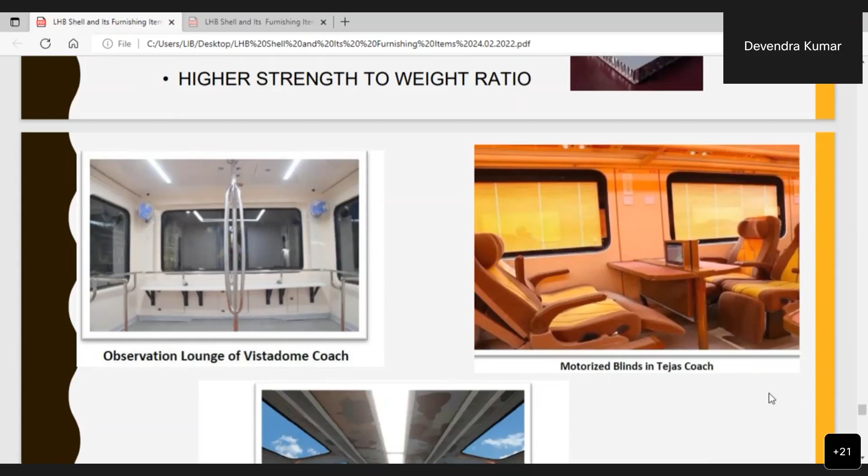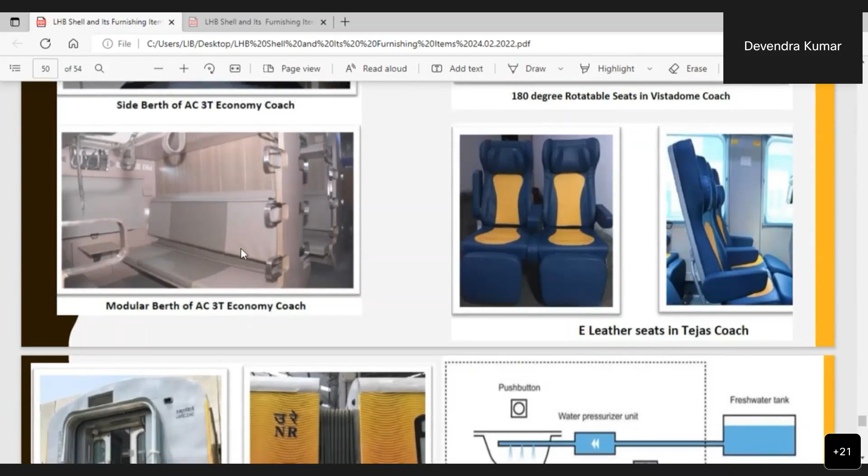This is a modular berth in AC 3-tier economy coach. These are e-leather seats in Tejas coach. So all these coach fittings have been provided to give better comfort to passengers, and these are easy to maintain and have very good aesthetics.

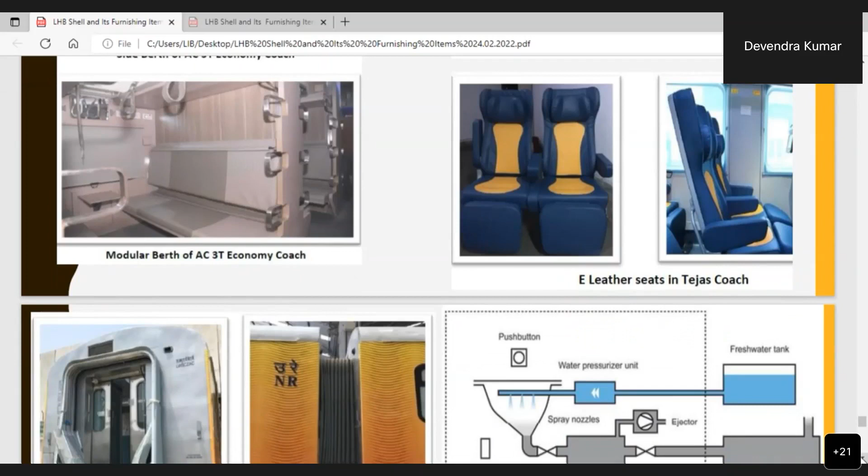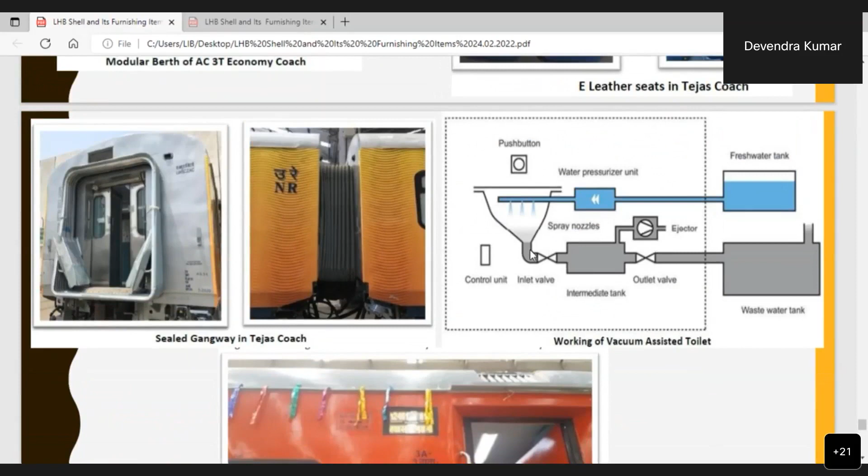This is the gangway of the Tejas coach. Between two coaches, this is a completely sealed area. Vacuum assisted toilets have been provided in Tejas. Digital destination boards in smart coaches.

Now, at the end of the session, which of the following is not a feature of the Tejas rake? Fully air conditioned, motorized blinds, vacuum toilets, energy harvester based diagnostics.